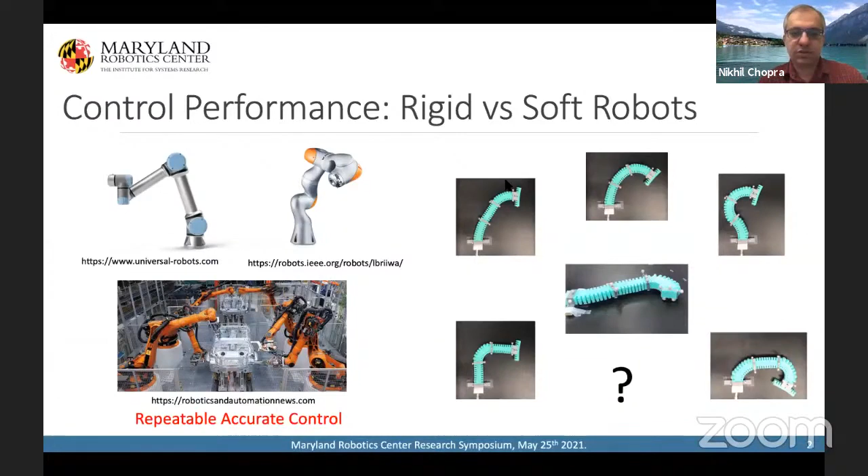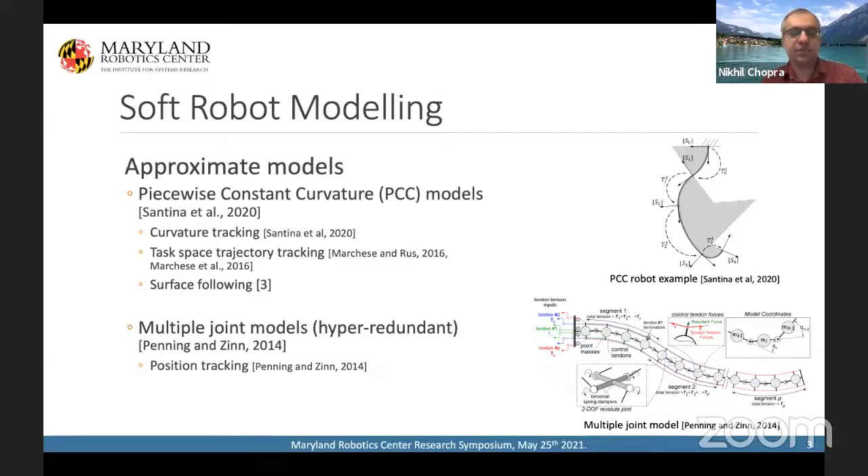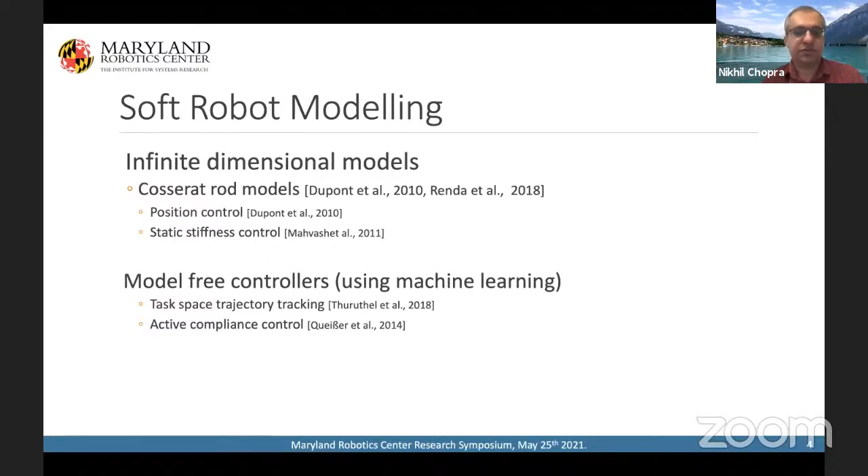So there are some modeling approaches. I'll go over some of them briefly, and then I'll focus on one. Most of the work that we'll be talking about today focuses on what we call the PCC model. But there are others as well: multiple joint models, and more recently the Cosserat rod models. There is also interest in trying to forget about models and just do end-to-end machine learning; some of the approaches listed here delve in that domain as well.

So what exactly is this PCC approach? The complexity of these soft robotic systems comes from the fact that they are infinite dimensional systems, as compared to rigid robots, where, say with revolute joints, I know how many degrees of freedom I have. Here it becomes quite a challenge. So one approximation method is to assume that your manipulator has piecewise constant curvature. In 2020 there's a paper in IJRR which details this model. What it allows you to do is represent a link as an RPPR model, which basically means revolute, prismatic, prismatic, revolute. Once you do that, you get the DH parameterization and so forth.

You can write down the dynamics in a form that is similar to what we would expect in rigid robots. I'm not going to go into details of what these matrices look like, but you can look at the paper that I referenced there. What it does is allow you to capture some of the dynamics and then start trying to utilize that in control. So one thing that we wanted to try out when we saw this model was how it works in practice. Can it really model some of the effects that we are anticipating are going to cause problems for us? One issue that comes up immediately is that these models contain some parameters which are uncertain.

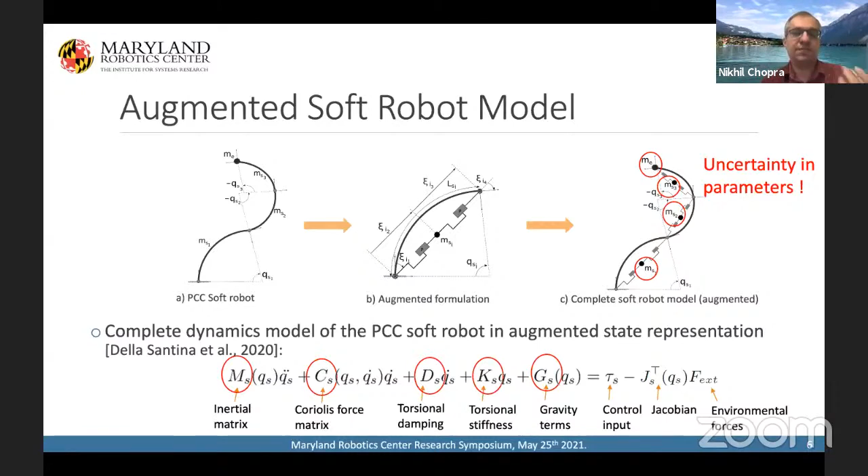So we would have to deal with that either through system identification, or in robotics and in control in general, we have adaptive methods to be able to adapt some estimates that we have so that we can do some of these things. So this is just to show that, I think Lasitha, who's leading the research as a graduate student, is going to be talking more about it in the poster session, but I just wanted to show one video of it.

This is basically trajectory tracking, that you can essentially do really well. So this is trying to illustrate that although this is kind of a limited model, right? Here the goal is basically to track trajectories; you want the tip in the task space to track a desired trajectory, and you can do really well, right?

If there was a rigid robot, this may not be feasible depending on various constraints in the environment and so forth. Okay, and we'll see some of the other things, how this helps us in doing certain tasks which are really not possible by rigid robots.

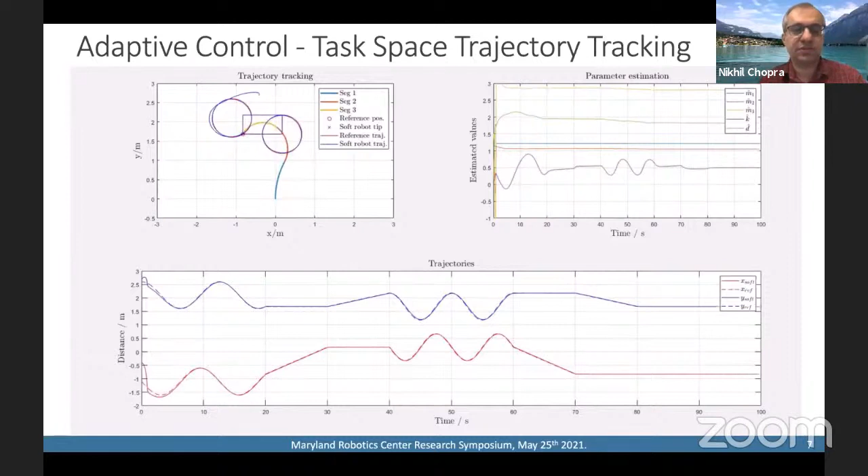So we also want to try it out in experiments, right? So here we have a soft robot. Essentially, it's a two link. So you see two segments like the one I mentioned, two segments of constant curvature, right? And you see the different points. So we are trying to do tracking in those different spaces.

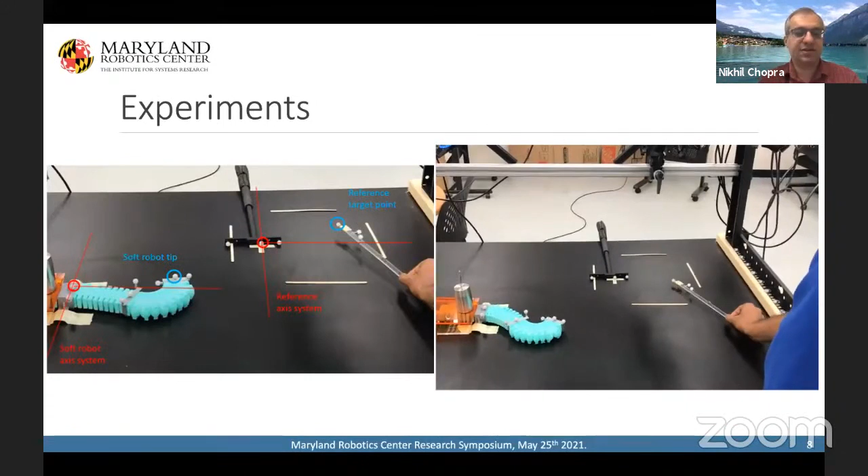So you can hear that noise. That's the pneumatics. These are very off-the-shelf pneumatics, and all the equipment is off the shelf. And what you're seeing here in the top right corner is the OptiTrack cameras. They're tracking the trajectory in task space.

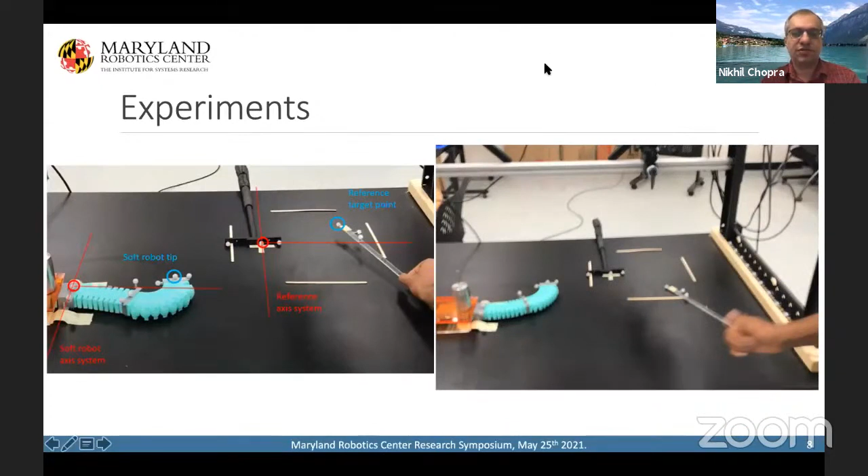And Lasitha is moving the reference for the robot, and the robot tip is trying to follow that reference. Okay, so we saw that this is reasonable performance; it's not fast and so forth, and there are some limitations, but its model is somewhat useful, right? And this is how the whole experimental setup looks.

And we would like to thank Ivan, who's in the RRL, who has helped in setting up some of these cameras and so forth for us, right?

So we also wanted to try it for one particular application, which is that let's say I have a rigid robot and I want to attach a soft robot at the tip so that it can do dexterous manipulation at the end effector, right? And so we want to try out, if I want to do some kind of teleoperation, how does it really work? Is it effective for that?

And this is the soft robot, the 3-link robot. So 3 segments, where the modeling assumes that they are going to be of constant curvature, right? And we're going to control it as such, and then see in practice how things move about. So you want to do tip tracking, right? And there can be a communication channel between the leader robot and the follower robot, and a human is trying to do that and also get force feedback.

So when you do that over a communication channel, there may be some time delays, and as soon as you do any kind of closed loop operation over a communication network, things can go unstable very quickly if you're closing the loop over a network.

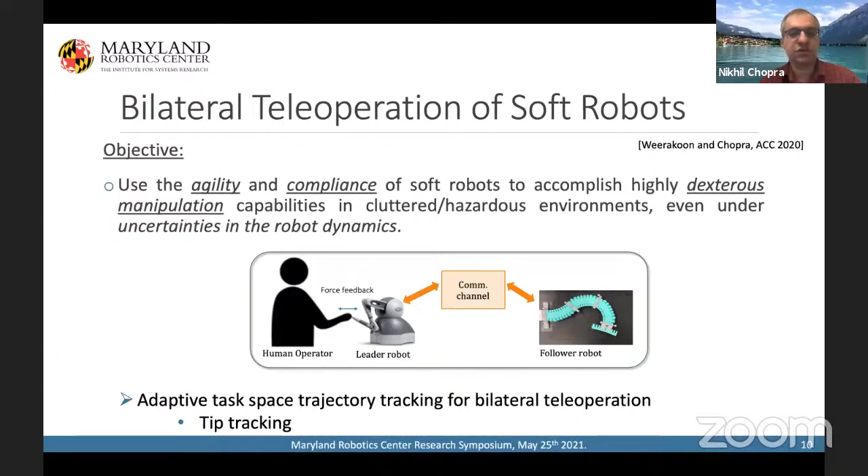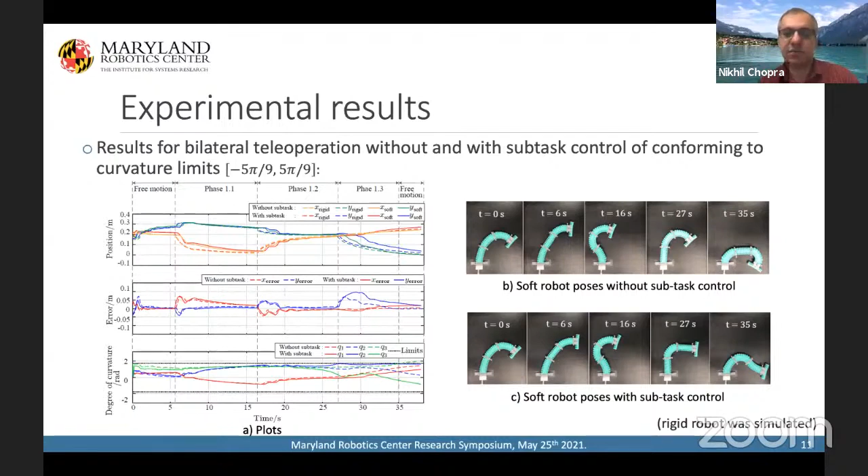We did this teleoperation here, and we also added some subtask, in the sense that let's say your soft robot cannot go beyond certain curvature limits due to maybe obstacles or some other things in your workspace, right? So this illustrates basically how the soft robot moved in the task space as it was being teleoperated. And similarly, we also wanted to see, if I put an obstacle, can I feel that obstacle?

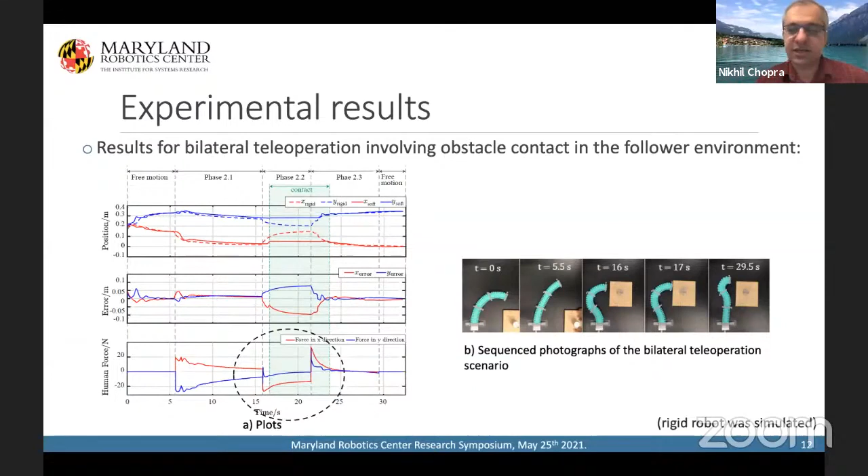Is there any haptic force that I'm going to be able to experience, right? And we can get that as well. So that's where we are essentially closing the loop, right? And we are getting that force back, and we can get a reasonable estimate of the force as well, which is highlighted in the region that you see there.

So what were the things that we got out of it? The response is slightly slow because of pneumatic actuation, and also some hysteresis that comes about.

We need to include actuator saturation because that's practically what you will see. So if your controller doesn't account for it, you're going to see below par performance. And some of these estimates, which we took to be constant, may actually change with time and with curvature as well, right? So you want to capture some of these things.

So now, as you saw, we had a camera there, right, which was detecting, so basically I'm measuring the curvature, and I want to control the curvature, and I have segments of these different constant curvature modules linked up with each other, right? So we want to be able to measure that bending. How much is it bending? Because that's my sensing. I need that information.

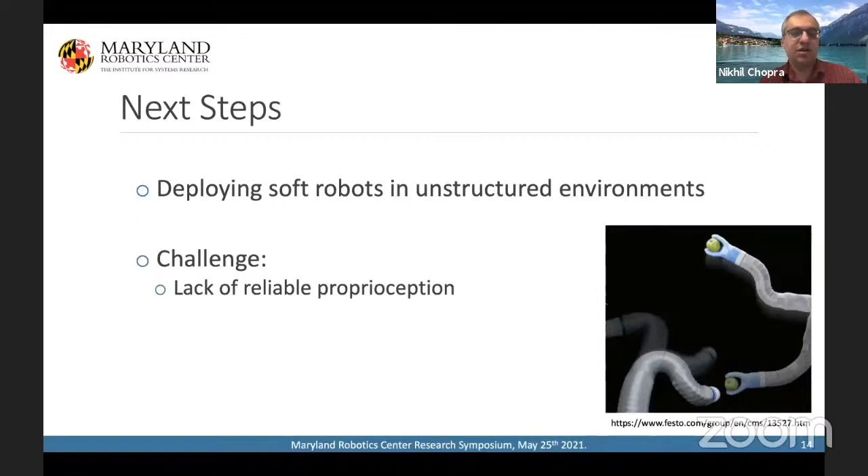Now, if I want to use this externally, we need that information from some other aspect, because cameras are not going to be there. Some people also use magnetic tracking. It's not the optimal thing to use from a cost perspective, and also if the environment is cluttered, it's not going to be helpful for you. So we wanted to figure out this bending information so that we can actually deploy it in closed loop control.

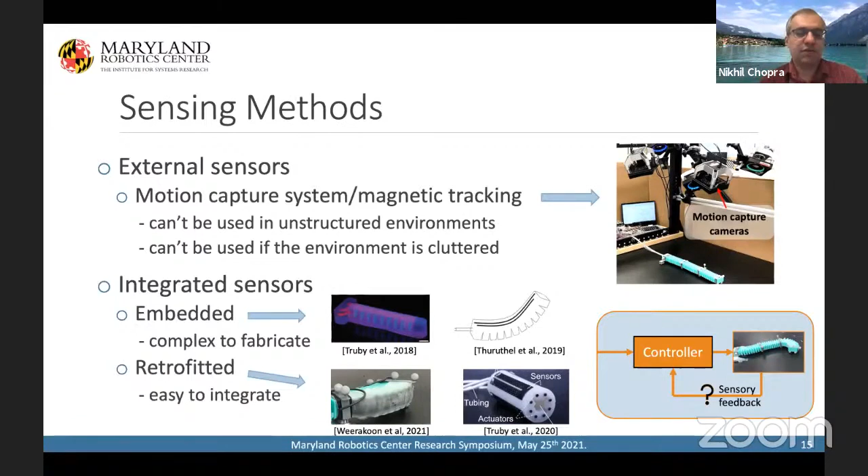So here our collaborators came to our rescue in some ways, right? So we were able to use these soft skins, which were developed in Professor Smela's lab. These are the graduate students who were involved in the work, Lasitha, Hudson, and Rahul, and Professor Smela and Professor Yu, who were collaborating in this research. And this is actually appearing shortly in ICRA.

So what essentially we did is that we used these soft sensing skins, which are basically a spray-coated stretchable piezoresistive layer onto a latex membrane, and you wrap them around the soft robot. So they're retrofitted. You can take a soft robot which is already there, and you can retrofit these soft sensor skins. And basically, we wanted to use them for curvature estimation so that we can do adaptive tracking control, where it's bending both ways.

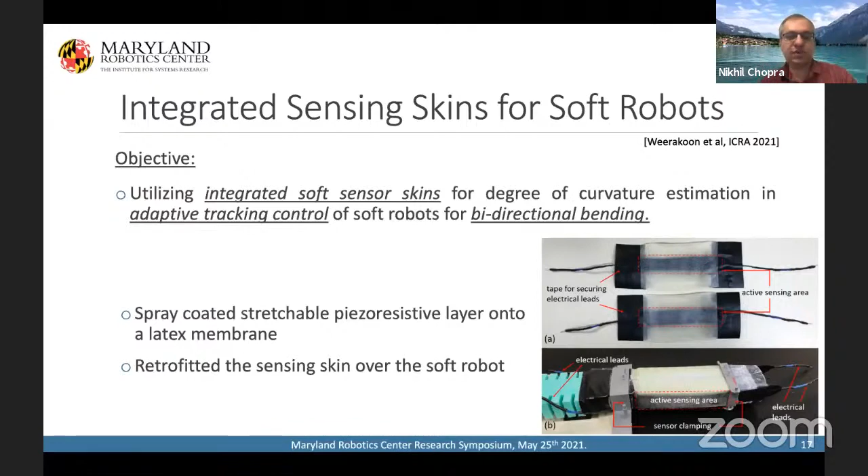This is basically how it looks, right? So there's segment A and B, and it's being bent. It's a bidirectional bending. And this is how the experimental setup looks. So for every link of the soft robot, we have 2 pneumatic actuation units for both channels, if you will, so it can bend in each way, right?

And one thing that comes about here is that I'm getting some raw sensor data. How am I going to correlate it with the bending information? So we created what we call an intelligent sensor, in the sense that we used a machine learning approach where we took some ground truth using the cameras that you just saw, and we saw those sensor signals and actuation signals as well. So 2 inputs, actuation and sensor data, are going into this learning model. And we trained an LSTM model, and these are some of the details for that model.

We wanted to see how it's going to perform in practice. So there are some parameters that you need to train, for example, hidden units. So we need validation sets to be able to do that. And we wanted to test it in real time, how it's really going to perform. So this is how it was performing. You see the raw strain signal, and the actuation signal as well. So we used both these things; the model is not just a regression model between strain and actual bending information coming from the camera, but it's also using the actuation signal as well.

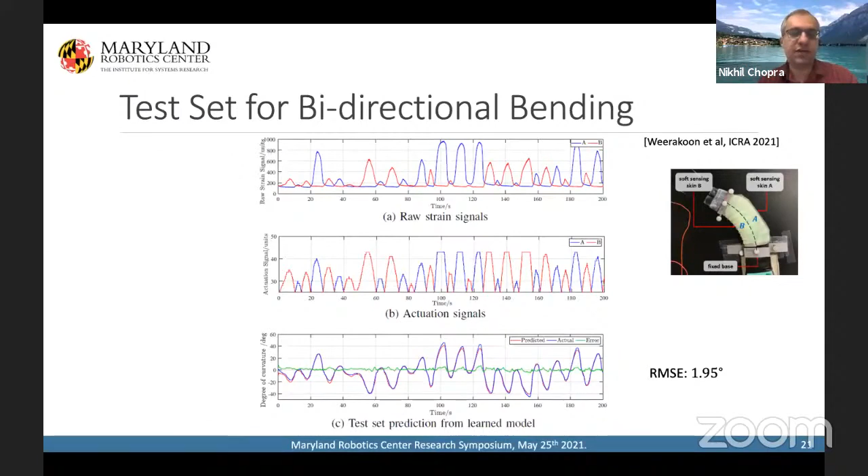So we basically now have a sensor that we can use for our controller, which we wanted to do. So here, remember that the state information that we're trying to control is the bending angles, right? And we now know that we have good estimates for that from our intelligent sensor. So basically, we use a traditional adaptive tracking controller in the joint space, not the task space, because we're trying to do adaptive tracking there.

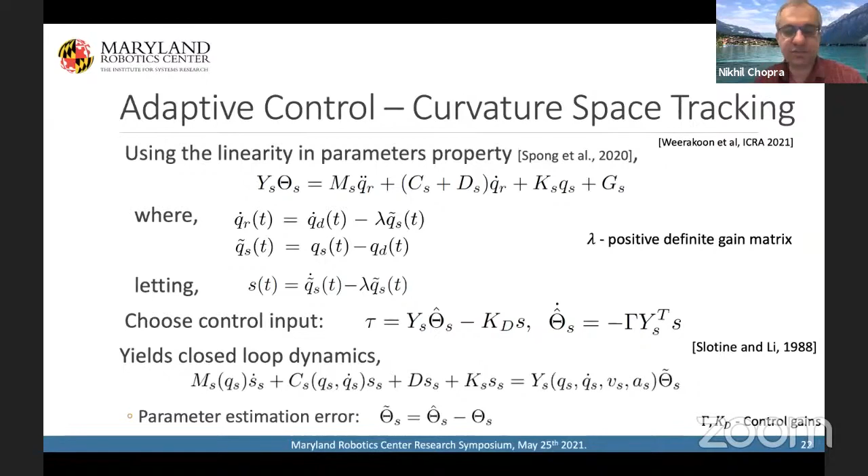And these are standard algorithms, so I'm not going into too much detail for them. There's a book that you can refer to, and it's called the Slotine-Li controller. And this is the experimental performance that you see for a low frequency target, using these estimates that are coming from a machine learning model. And you can see that we can track it reasonably, both for a low frequency target and a high frequency target as well. This initially was for the unidirectional bending, and this is for bidirectional bending.

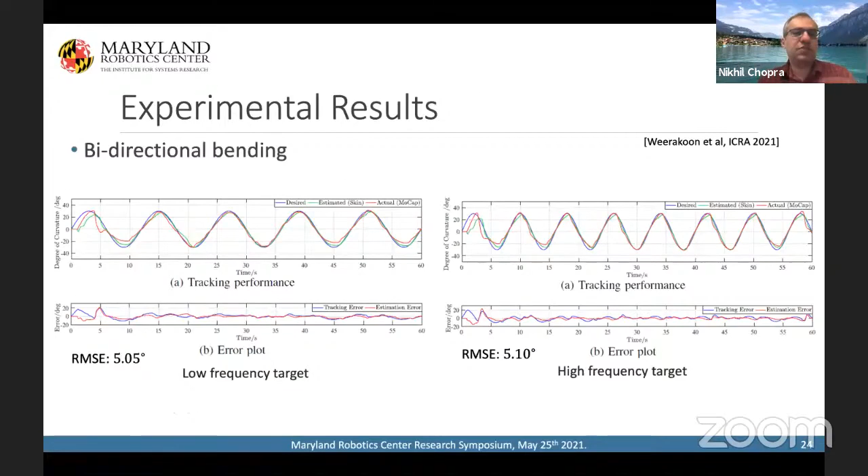So what we know here is that we can essentially do control for fully actuated robots, which are modeled using the PCC assumption. Now, if you look at the robots on the right, these represent some very challenging control problems and modeling problems as well. And people have been trying to come up with various algorithms to address them. And we can now flip and do all kinds of things, which was not possible maybe a decade back, for example.

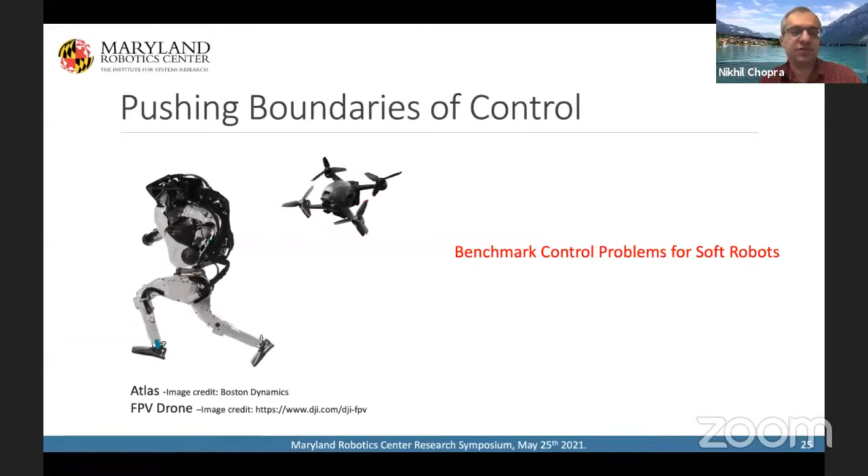So we would like to see how we can come up with similar problems. What are the challenge problems that we can see in soft robotics? We want to figure out what are the limits for the control, for the modeling, for the sensing, and we wanted to come up with some interesting problems to study these effects. So in control systems, there are challenging benchmark problems for testing out, for example, nonlinear controllers. For example, the cart pendulum system, or the ball and beam system, or the Pendubot system.

So we came up with a system which we call the soft inverted pendulum with a revolute base. Essentially, what you have here is a link, actuated using, for example, pneumatic actuation, and you have a revolute joint which is not actuated. So there are 2 degrees that I want to control, but I have only 1 degree of actuation.

So if you do the maths, you take the kinematics, and from that you go ahead and derive the dynamics, you will get this kind of a system, which again resembles a typical model for an underactuated robotic system. So the 2 things are the degree of curvature that we're trying to control, and the base rotation, which is not controlled here.

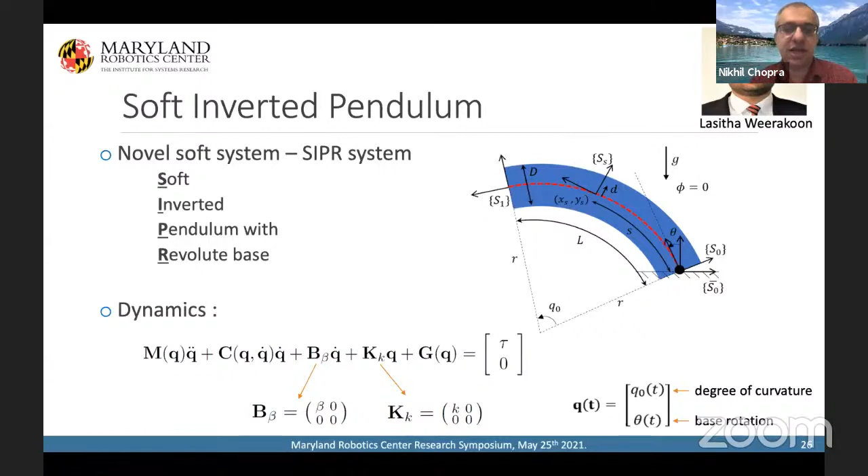So the problem essentially is that I have this pendulum, and I want to swing it up. It's at the lower configuration, and I want to first swing it up and stabilize it at the top configuration. Some of the methods that are used for traditional underactuated systems are called energy-based methods, where you figure out where you want to go, you figure out the energy for that configuration, and you try and drive it there. And then once you get in the vicinity of that configuration, you switch to a linear controller, and you stabilize that configuration.

The second approach, which has been quite useful for a lot of systems, is what we call partial feedback linearization based methods.

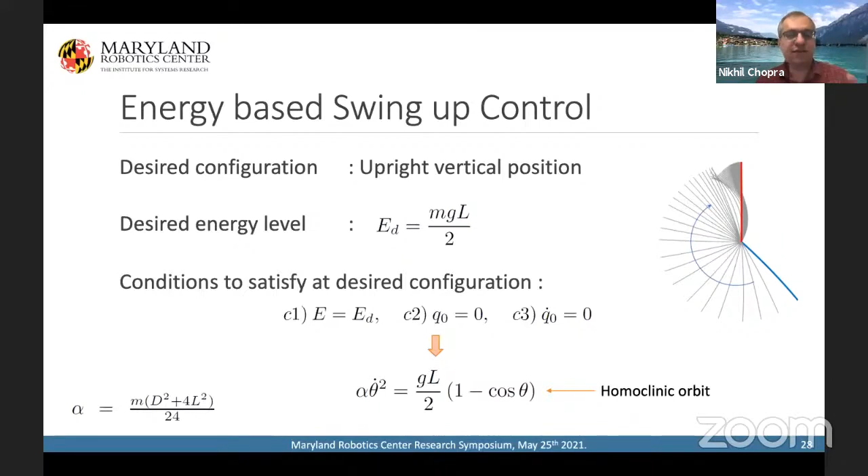And they were developed in the 1990s and have been used for a lot of underactuated systems, right? And so I will just give a brief overview of what we did. So basically, this is the configuration energy at the top level. What we are trying to do is the controller is trying to drive it there. So it's going to figure out what we call the Lyapunov function. For those who are familiar with it, it's kind of composed of that.

We are trying to make this energy zero, right? Difference of energy zero, and at the same time, have some other terms in our Lyapunov function as well. So you do the maths and so forth, and you can eventually show that indeed you will actually stabilize, or you will at least come to a kind of limit set where your energy basically will match the energy that you want to drive it to. Okay, and we have a paper that details all of this. I'm not going into details for that.

And then there's a standard LQR method for, once you get in the vicinity, you can stabilize it. And you also compute the region of attraction, so that the linear controller can actually grab it from there and take it on. And once it's there, we switch to the linear controller. So just to show you a quick simulation.

We are still building the system, and now you see that this is very different from a typical swing up control problem, because the system can really bend, right? So it'll swing it up, and it'll try to get there, and eventually get there, and then basically the linear controller will take over. So shortly you should see that, right? So it stabilizes there. So we find this a very interesting problem to try out the controllers that people are trying to come up with for soft robots.

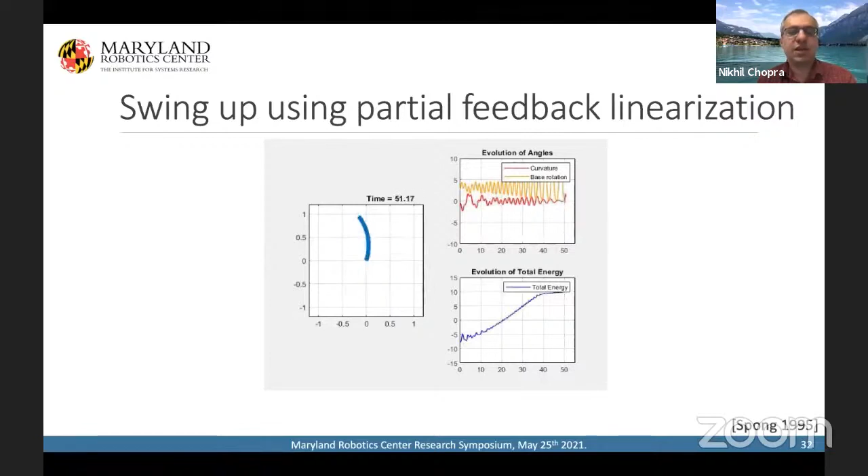Similarly, I mentioned to you the problem of actuator saturation. So for that, we explicitly saturate the control effort. It's a slightly different approach. We use the partial feedback linearization approach. This is actually really slow, so we had to speed up the video in the interest of time. And what we find is that eventually, similarly, the good thing here is that you can limit the control effort. So this may be very useful in a practical situation, when we actually develop the actual system and test it out there.

So these were some of the efforts that we have been doing recently, and I just want to summarize them. The take home message is that we really need a very integrated approach. If you want to develop high performance for these systems, you need a very integrated approach in sensing, modeling, and control. And benchmark problems here can help in identifying limitations and finding new pathways for sensing and control.

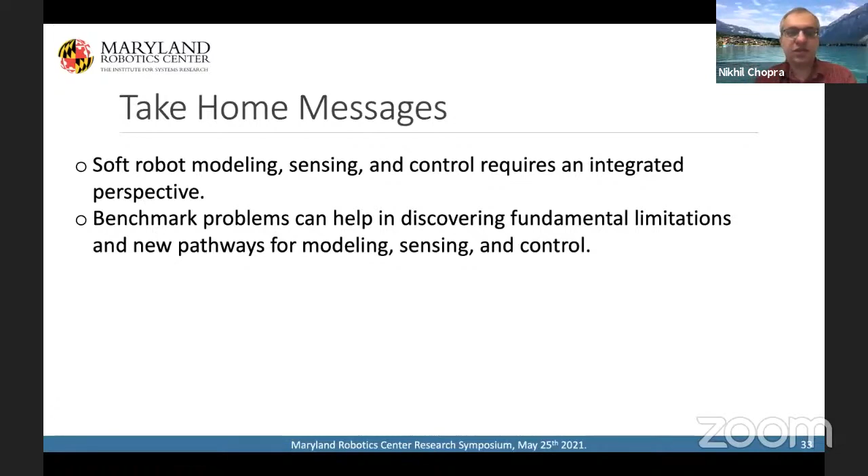So while teleoperating, is there a way where we can sense the obstacles? I'm not sure. I think maybe they're referring to exteroceptive sensing beyond the force-based sensing that you mentioned. And so basically you could put a force sensor there at the tip and you would feel it. But our controller provides kind of an indirect sense. You will feel the obstacle there. So you will know that there is an obstacle there and you will stop there.

If you push it harder, if it was a rigid robot and the obstacle was really rigid, you will not be able to push it farther. But in this case, we had a soft obstacle. If I really push it, it's going to go through.